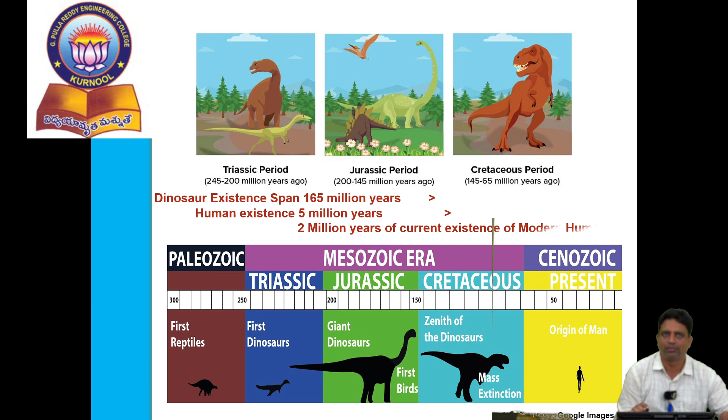This classification is not new to us. From the era where people were still not in existence, classification was still being carried out. Humanity and human mankind brought their existence in, and very nearly around 2 million years ago, the current modern humans have evolved. Since this period, many innovations, inventions, and discoveries have been brought. All these representations on the screen only show how classifications are made, and from that period itself, the division of human intelligence is done.

So something around 165 million years ago there was zero human existence; something around 5 million years back, the first mankind was introduced to this earth; and something around 2 million years ago, an intelligent man who could cook, eat, and hunt for survival was introduced.

From there to the current era, we are seeing a lot of differences in our life. If I speak of current technology, industrial IoT, under which classification do we keep it? If we look into the market arrangement, the title given for industrial IoT currently is Industry 4.0. How is this classification given? What is this number 4 called?

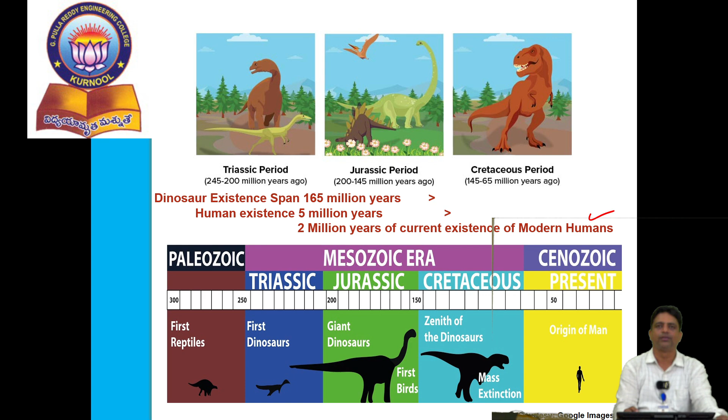To know that, we need some idea of human civilization's beautiful discoveries and innovations for civil society usage. One of the biggest industrial revolutions that made mankind develop good transport and communication was the first introduction of the steam engine, somewhere around 1760 to 1840. This was the invention that brought the industrial revolution. An industrial revolution is when some product is developed and makes an impact such that it is produced everywhere in mass condition, in bulk capacity.

We consider that development as industrial development. So Industry 1.0 is considered the first industrial revolution through development of the steam engine. Then the second revolution is considered Industry 2.0, for the breakthrough development of electricity. This was also considered in mass production.

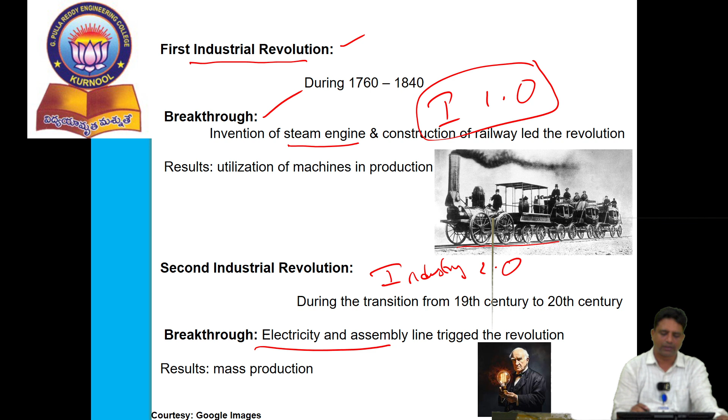These are all Google images we have taken for courtesy in support of this discussion. Then the third revolution that made the complete world utilize technology was the digital revolution. Computer invention was not the biggest revolution itself, but when it was brought together with the digital revolution, somewhere around when ICs showed their impact instead of vacuum tubes or basic transistors, and when ICs led to VLSI procedure, this was treated as the third generation of computers.

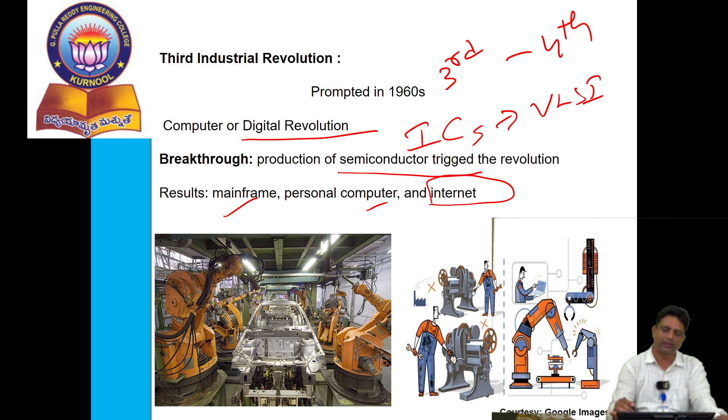In the fourth generation, we had a big digital revolution with mass production of semiconductor ICs. There we had the division of mainframe computers, personal computers, and the basic introduction of the internet. All these led to the third biggest industrial revolution, which we call Industry 3.0.

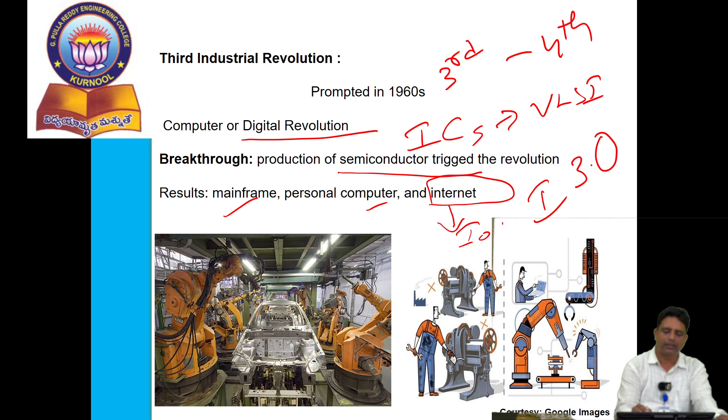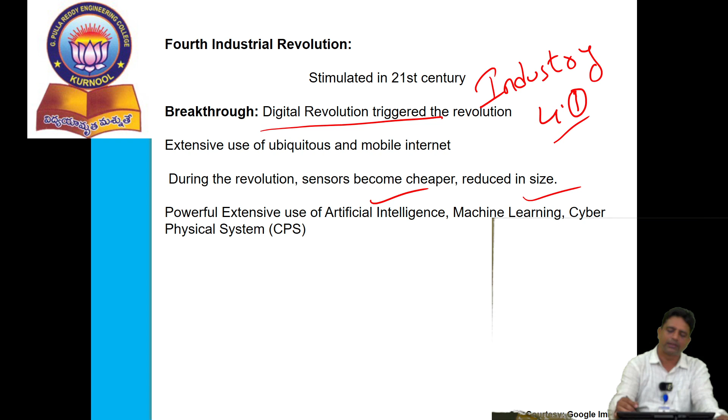From there, when this industrial revolution continued from internet to IoT, we consider that our fourth revolution came into operation. That's why the title given for industrial IoT is Industry 4.0, the digital revolution of the Internet of Things. From here, one of the biggest operations that evolved was AI, machine learning, and cyber physical systems. From here we have the mass production of all IoT applications in society. So that's the introductory part of why we have Industry 4.0.

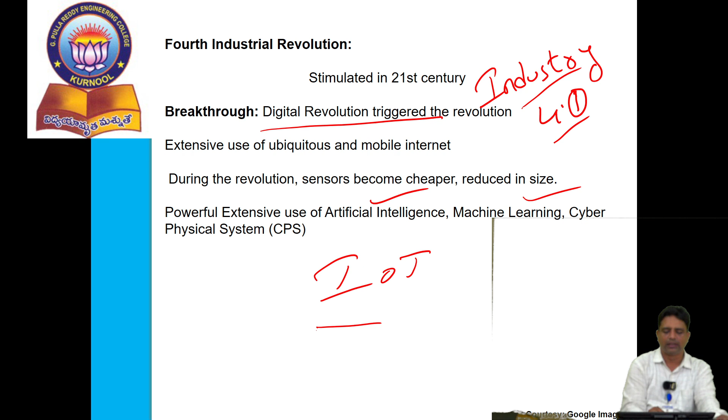So what are the major things we consider for any IoT block? It definitely has a microcontroller, a processing device, something called the brain of the system. The purpose of the brain of the system is to select any object, consider it with a parameter, whatever that parameter may be. The object could be a human body, a big rail, the complete earth, something visible or not visible—anything in the universe can be treated as an object. Whatever parameter it takes, it is going to sense that.

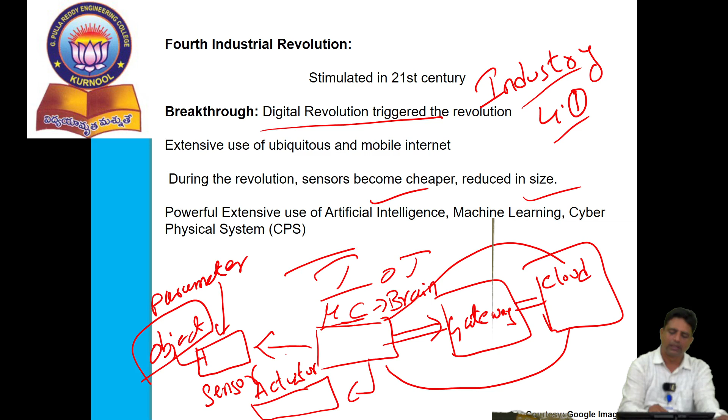So one of the most important devices in IoT is the sensor. Whatever it senses is read or operated by the microcontroller, and if it reflects this through an actuator, it is called automation—there is no IoT in this. But when this is brought to a gateway, from this gateway I can preserve and share it throughout the world—what my information is doing, what my sensor is doing. I store the information and retrieve it whenever I want, and store it again whenever I make modifications. This set together makes a combination of IoT.

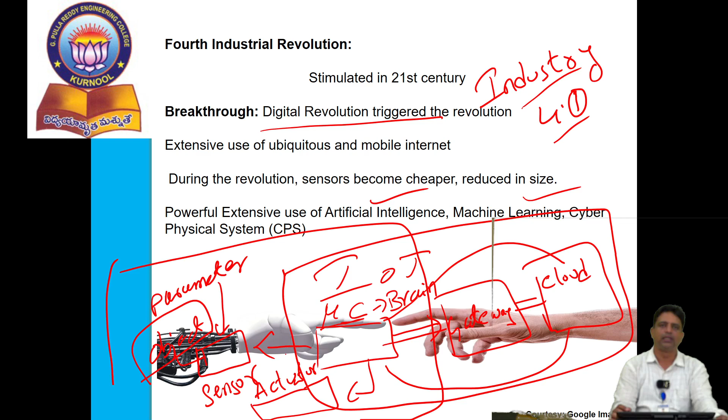So when this product and application is raised to mass production, we have our next level of information called Industrial IoT. So the simple business reference model of Industrial IoT is as mentioned: every product in society can be added with a sensor, and everything in society can be observed, monitored or controlled through the internet, and we can retrieve the information present at any location from any part.

So if I have machines to control, or tools to operate, sitting at any part of the world I can see the connectivity and the analytics that are happening. So the user need not be physically present every time near the machinery or devices in order to show improvement or read the information. Sitting at any part of the world, that belongs to IoT.

What is industrial IoT here? When it is done at a large scale, not only for individual purpose. For example, someone jogging every day sees their health condition improvement through a smart watch connected to their mobile phone via Wi-Fi or Bluetooth. This is called individual development, where tools continuously support the health improvement of one individual.

If the same thing is applied at a large scale for a health monitoring industry, maybe a hospital takes care of some 1 lakh people to improve their health through jogging. Maybe it makes a study of how to improve the health of 1 lakh people through jogging, or through proper diet. For everything there is a scale, and that is measured and treated as a large scale application.

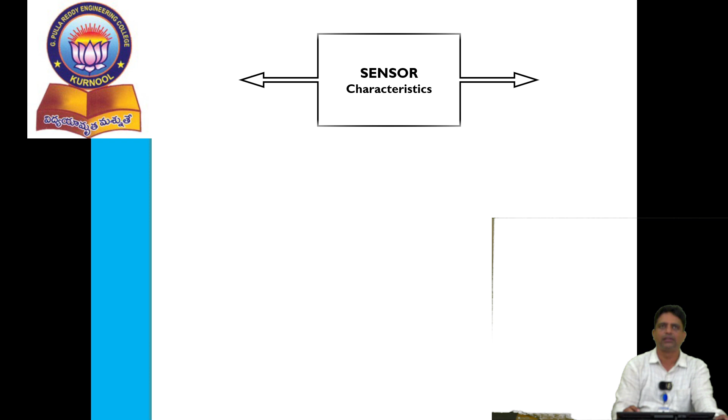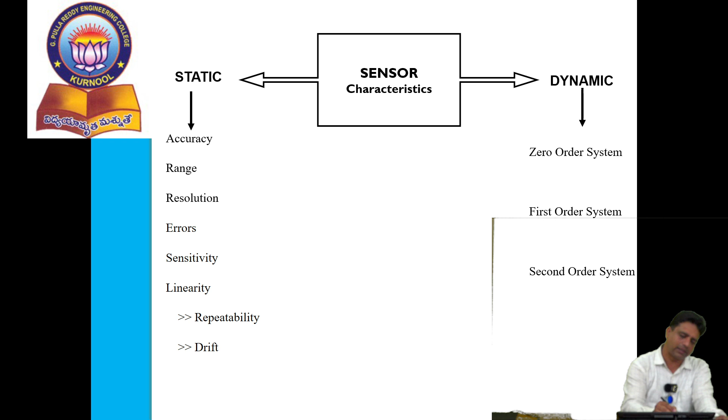Let us select a very vague example after looking over the sensor characteristics. One of the major essential components of the IoT block diagram, which is the first level of IoT arrangement or Internet of Things application. So the major factors that determine the best purpose of a sensor are its resolution and sensitivity.

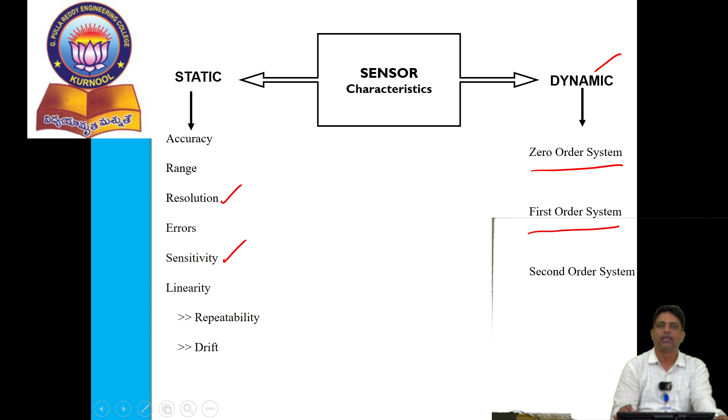Then the zero order system is about its dynamism, how quickly it is going to respond. After responding, is it going to forget? After responding, is it going to react? Based on this, it is going to be treated under zero order, basic level, high level, or smart sensors. So in general, we will have two different categories of sensors.

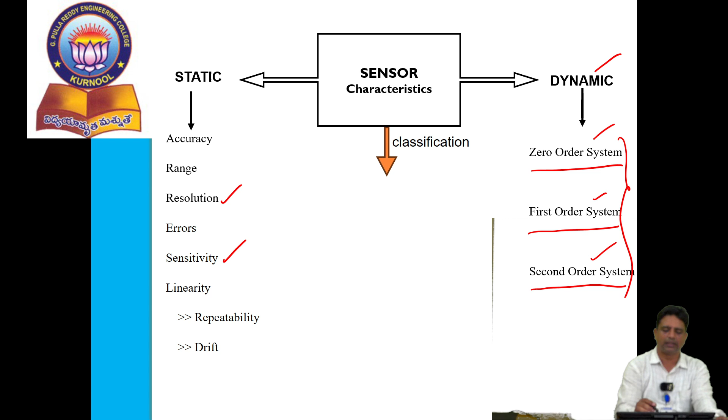Whatever may be the sensors, we will have proximity sensors and touch sensors. All these sensors are classified roughly, for example, like this: radars, lasers, gas sensors, temperature sensors, and so on. A very vague example shall be selected at a lighter view.

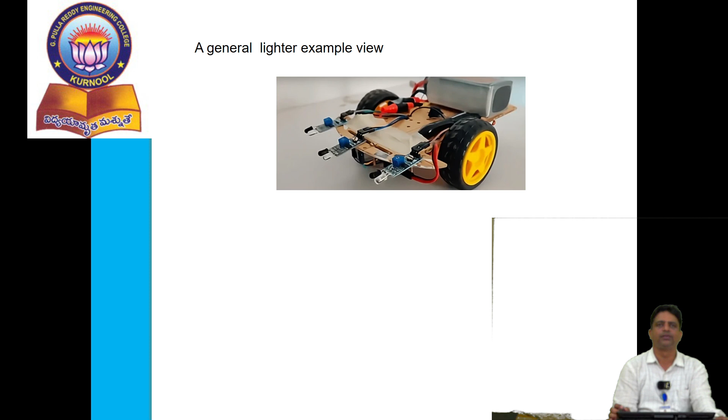Let us see. At a rough view, a simple IR sensor is operated to detect some obstacle, and it turns the robo vehicle, something like this. All this we work through mobile Bluetooth. All these are considered automation applications, not totally IoT.

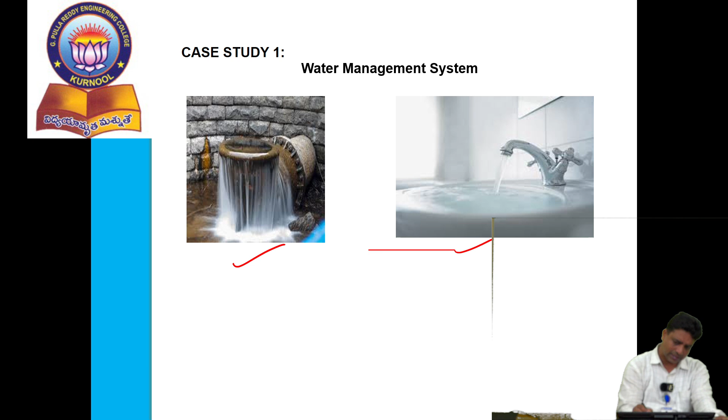Let us select a case study, a societal problem, on how we can utilize this in an IoT application and scale it up to a large scale arrangement. Let us see this: a simple application like how water is getting wasted, and how to preserve it.

Every time the answer is humans should involve and control that — a person should go switch off the canal or switch off the valve at the pipeline, or turn off the tap. Instead of doing this, can we utilize some arrangement so that humans will not control the valve, machines will control it instead? How will it happen?

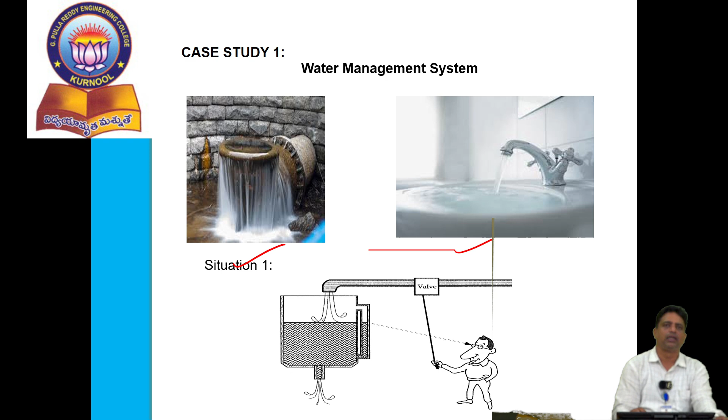With the help of a simple sensor. Let me take a simple example as presented, a more known view of the representation. We keep sensors at every level, so if the water level is at the top, say 100%, the motor should automatically get off. If the water level is totally at 0%, a buzzer should ring and the motor should automatically get on.

It also needs to show us how much level of water is left over or getting filled in the water tank. For all this, we use a water tank indicator sensor, a simple sensor which has two nodes, anode and cathode, controlled by a transistor arrangement, with indicators like an LED. This resistor is for the LED, this transistor is to control the sensor and buzzer operation.

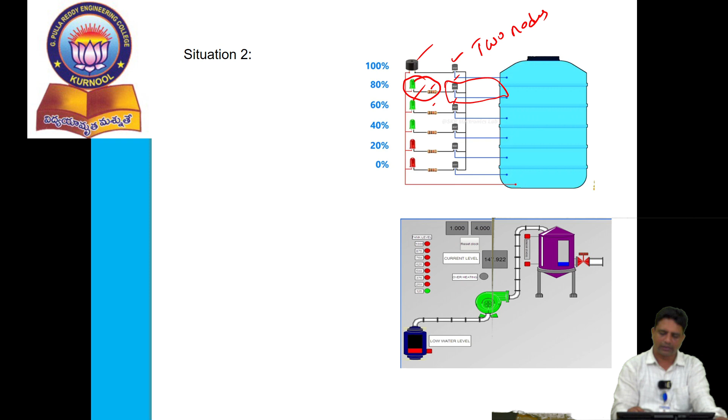Now, the situation is like this. We performed this and created, using simulation software, how the operation happens — Modbus simulation software, where we can operate this. Now, at the output, when we tried it at the low end, at a practical level, we tested it with some buckets and sensors.

An ultrasonic sensor is used here, and the display will indicate the level of water sensed. Though we planned it at a high end, when we brought it to practice, it was at a very moderate practical application.

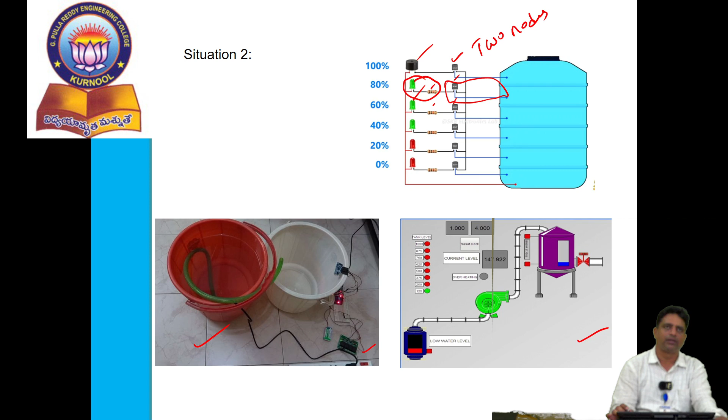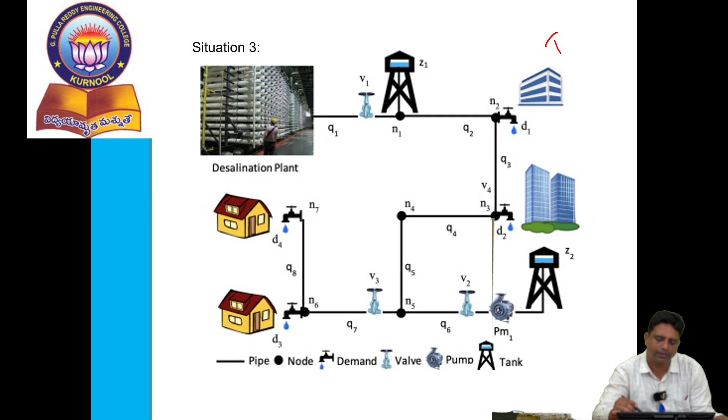Now if it is kept at a high end in this way, for a complete city, how will it happen? When brought to large scale, suddenly a simple valve controlling operation becomes an industrial application. Using IoT, I used a sensor, a controller, and an internet arrangement in order to control the movement of the motor filling through pipelines. The same concept, when controlled for a complete city or any metropolitan region or state, is considered a high-end project.

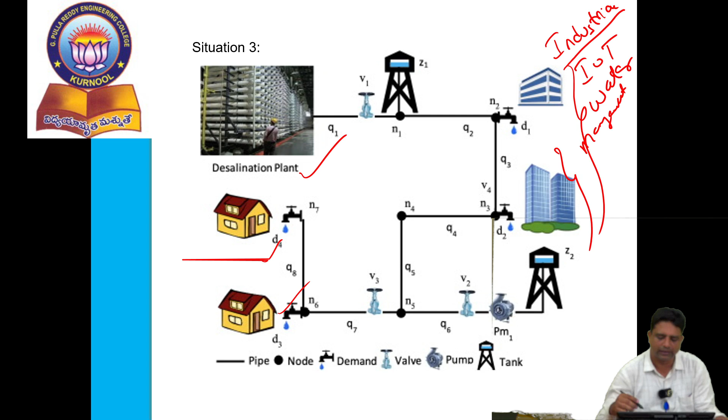So this is called an industrial IoT application for water management. This is how industrial IoT developments are done, represented through Industry 4.0 operations. This is a justification for this part. Up to this part we'll take the discussion, and we'll stop here.